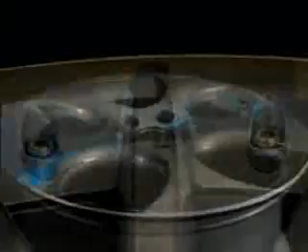BBS wheels are elegant. These giants of the sports world are naturally discreet. They don't need to prove a thing. It's this confident sense of style that car drivers and car makers appreciate in equal measure. Form following function, and lines based on mathematical curves that create the ideal line in every curve. Dynamism defines the appearance. That's the distinctive feature of BBS.

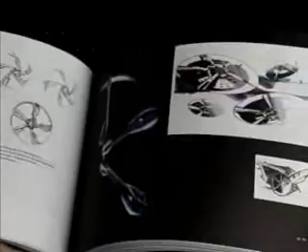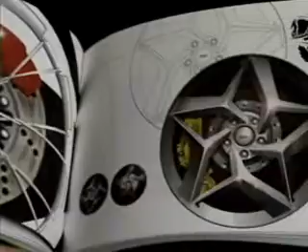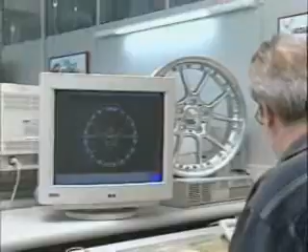Cooperation with highly regarded designers keeps the formal language fresh and satisfies customer-specific brand worlds. Within this creative network, maximum customer orientation and flexibility have proven themselves again and again. Development is teamwork on the customer's premises, ideally in a standardized software environment with problem-free interfaces for the transfer of data models and simulations. Achievements are passed on, results are maximized.

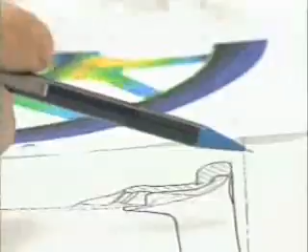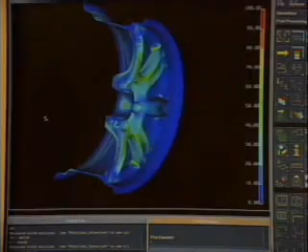At BBS, development primarily involves innovation, and that's why we don't need to keep on reinventing the wheel. Special development modules enable fast results within the cost targets. Simulations allow us to reduce the number of potential solutions down to a small number of finalists. But it's still the test benches that provide the ultimate results.

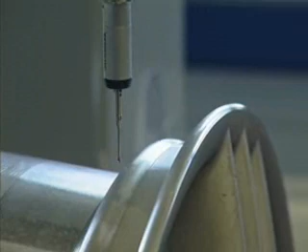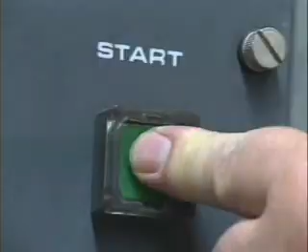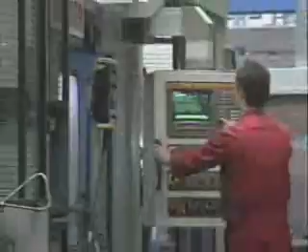BBS has a comprehensive testing area with all the testing equipment used to verify the usual standards and specifications. At the same time, our in-house requirements are far beyond those of the legislative and testing companies. After all, at BBS, every wheel has to be able to withstand the extreme conditions of motorsports. Various factors have to be coordinated with one another, such as light alloy construction and stability, aerodynamics and brake cooling, or design parameters and production optimization. Add the highest processing safety and you have a high-grade quality product.

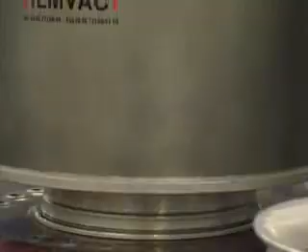BBS has several production plants worldwide, all working to the same high standards. All car manufacturer certification guidelines are fulfilled. Our ultra-modern process-oriented and self-organizing structures reflect the state-of-the-art in plant technology. The hall layout enables different plant levels, tool changes without production interruptions, parallel production of large and small batches, and redundancies in process-critical applications. Reallocation of capacity on the fly takes place in all our production plants worldwide.

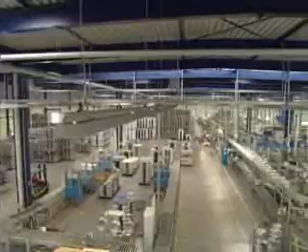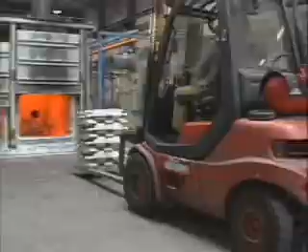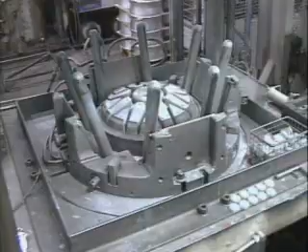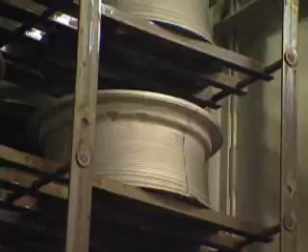The production process begins with fully automatic low-pressure casting machines. The alloys are standardized, but the decisive difference is made by the timing of the processing steps and also the details of our tool construction, like temperature control, for instance. During the several hours of heat treatment, the material properties of the future wheel are precisely adjusted. After the solution treatment furnace, the aluminum structure has the required structure and elasticity for operation.

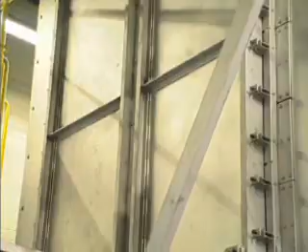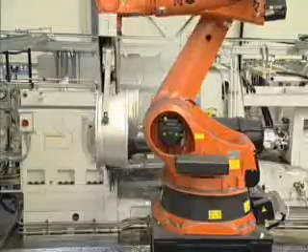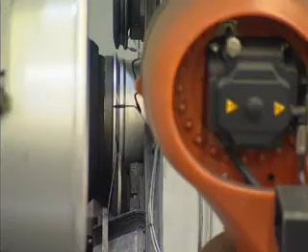In another furnace, the wheel is reheated to the ideal temperature of 300 to 350 degrees. Then it is mounted concentrically on a negative mold. In a uniaxial movement and under high contact pressure, a continually lubricated roller head creates a rotational profile. It's done on the principle of the potter's wheel. The heated metal is simultaneously molded and compressed. This results in more stability, combined with less use of material and less overall weight. BBS is considered the pioneer of this process. It's known as flow forming.

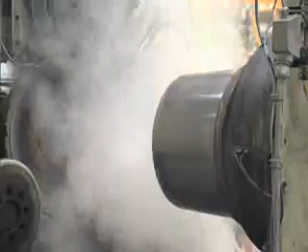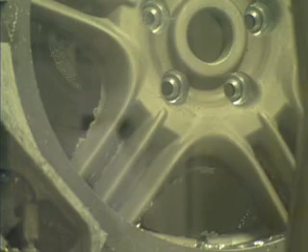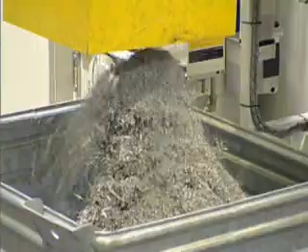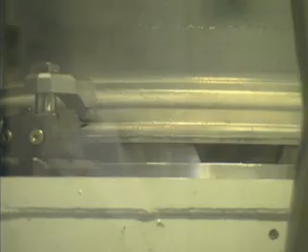After casting, the sprues and burrs are removed in a fully automatic CNC machining station. Bolt holes, the valve hole, and the center bore are also drilled. This is now done dry at BBS. Liquids, which are normally essential for cooling and lubrication during these machining processes, are not added. The overburden is fed straight back to the melting furnace. BBS specializes in this dry machining process, which has won several awards. The entire station is hermetically sealed in order to prevent any emission of aluminum dust.

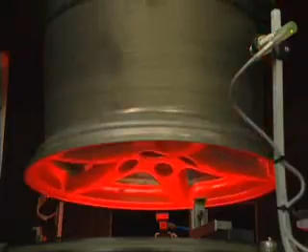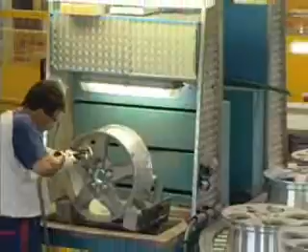Infrared sensors guarantee the precision of all contours. With special wheels, the deburring process is still done manually. Largely automated conveyor technology guarantees steady material flow between the machining stations.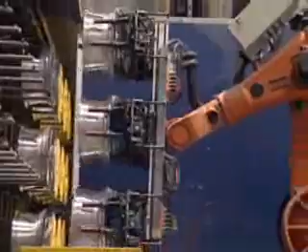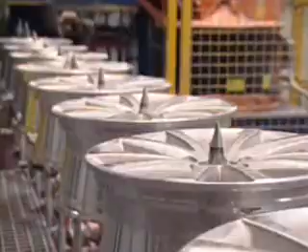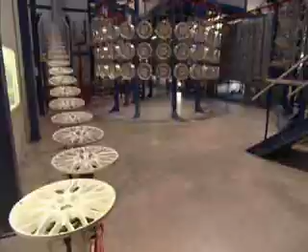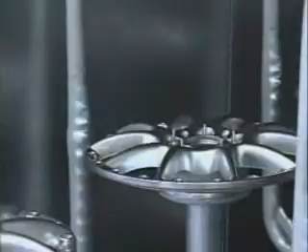With its chrome-free finishing process, BBS has introduced an innovation that has set new standards worldwide. This process has won us numerous prizes, including the Entrepreneur Award for medium-sized businesses. Melting the lacquer by means of powder coating leads to several advantages. The coating is thicker and, unlike conventional coating, far more even at all locations in the wheel geometry. The double-thick layer of varnish sharply improves scratch resistance and anti-corrosion properties. One reason why the use of BBS wheels in winter conditions is unrestricted.

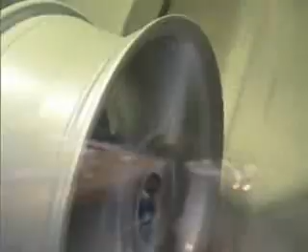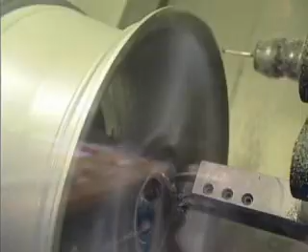Diamond-cut BBS wheels are especially popular. They owe their deep and brilliant luster to a special technique. After application of the coating, it and the aluminum surface are partially polished on automatic lathes using a diamond-tipped tool. This creates a highly attractive alternating pattern between polished and unpolished surfaces.

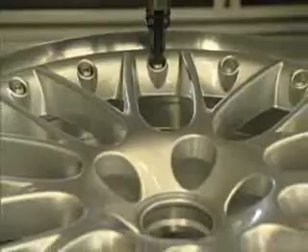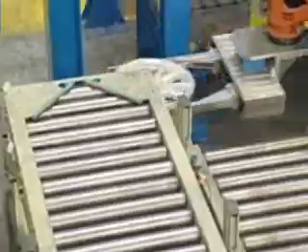High-quality modular wheels are an integral feature of the BBS brand. Forged spokes and flow-formed rims can, for instance, be combined to form an ultralight wheel. The sections are connected by titanium fasteners. OEM demands delivery to car makers, just in time and just in sequence. On the other hand, the aftermarket is characterized by seasonal cycles and fluctuations in demand. These extremely different requirements have to be satisfied by production and logistic planning, from mass production of millions of wheels to a single prototype wheel in motorsports.

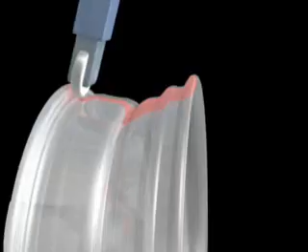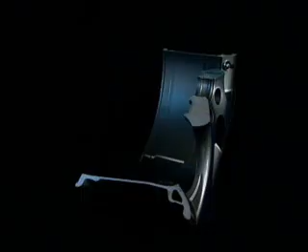With the GTI wheel of the VW Golf 5, an entirely new process of hollow space wheel construction has reached series production. The hollow outer shoulder is created via flow forming without the core being lost or enclosed, a world first in automotive engineering, a breakthrough in cost effectiveness. Hollow space wheel constructions can be made visible in the volume segment. The inner shoulder can be formed in just the same way, with considerable benefits with regard to costs, stability, and mass moment of inertia. Combined with the slide casting process for the spokes, complete wheels with airtight hollow spaces can be visualized in a self-contained production process. This is Air Inside technology from BBS.

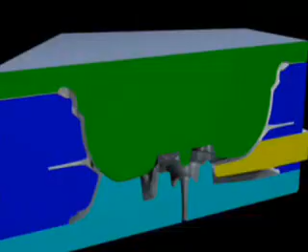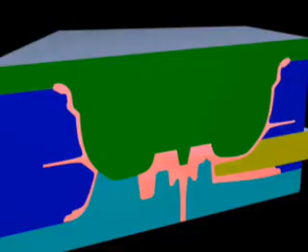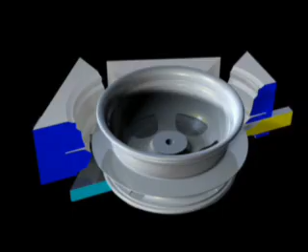Air Inside technology is a good way of demonstrating how the strengths of BBS work together. Restless pioneering spirit, operational excellence, complete command of processes, intensive cooperation with customers, and systematic market orientation all combine here to create a key technology in chassis construction. Less unsprung masses and improved temperature dissipation increase comfort, handling, and safety. The airtight hollow spaces enable new approaches to tire pressure compensation while the vehicle is in motion and reduce tire damage risks. The achievable ratios between wheel load and wheel weight are exemplary. The wheel design also achieves an entirely new dimension of freedom.